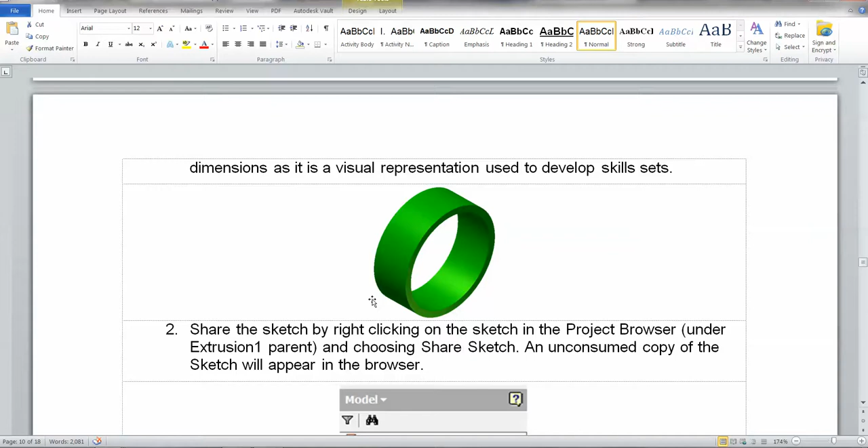Okay, so the next part we're going to look at here is creating this tire, the tire that goes around the wheel on the Automoblox set. Some of the dimensions are not exact, but the basic idea applies. First thing we need to do is create part of this sketch, and it will look like this, and these are the dimensions you want to use. So take a moment to do that and then come back.

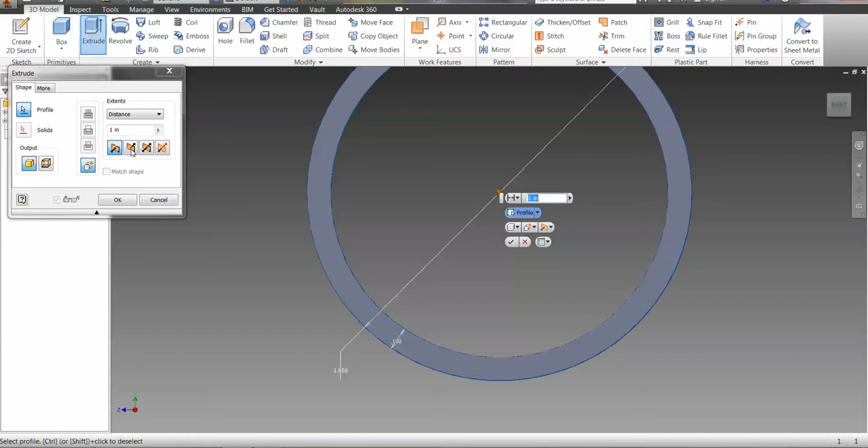All right, now what we're going to do is extrude this. We're going to do a slightly different extrude than we've done before. If you look over here in the extrude, there are different directions you can go, including what's called a midplane, which goes both directions as it extrudes. As you can see, it's coming both forward and backward. We're going to make this an inch, sketch is fine, and then click OK.

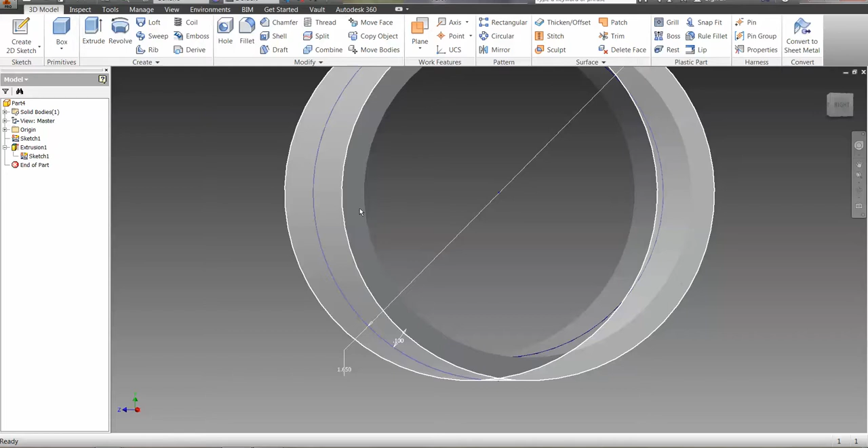Now we're going to share this sketch so that we can use it again. We've done this before, but one of the things is that as we share the sketch, it can be really difficult to see what's going on there. So on the extrusion, I'm going to right click and come down and we're going to suppress that feature. When we suppress that feature, then we don't see it, and it doesn't get in the way of the rest of our drawing, which is good.

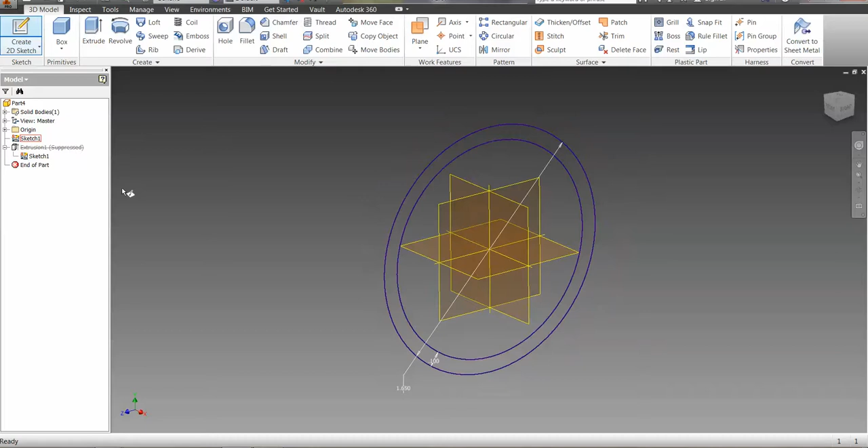So now we're going to create a sketch on this plane. I just clicked one of those circles to get this. Now I'm going to use a few different commands, the line command, starting from the center here, going straight up.

Now when I do that, I'm going to use that as a reference point for two other lines on either side of it, like that. Now these lines don't have a particular distance, it only matters that they come from the center and go past the outer edge. Now I want to keep this line, but I don't want to use it, so I'm going to go back and make this a construction line. There, that's better. Now that it's a construction line, it won't be involved in any of the rest of the drawing, but it is a good reference.

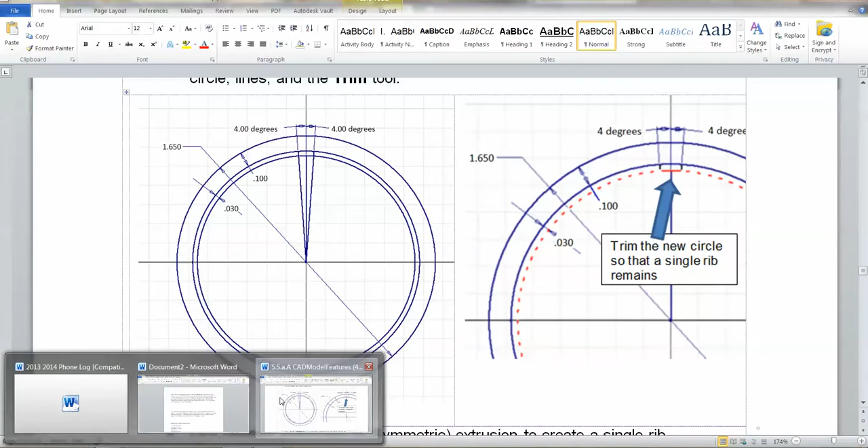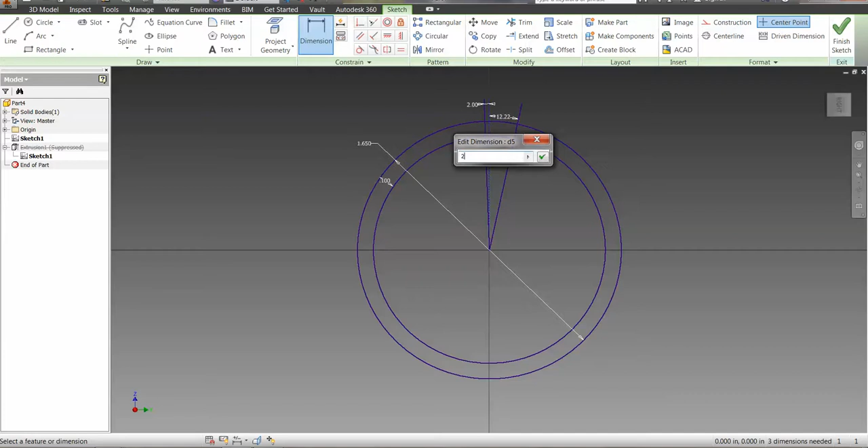Now that we've got that, we need one more circle in here. Do a concentric circle, and it's going to start from the middle like the others did, and just go up a ways. Then I'm going to dimension it from the other circle, the inside circle here, and that's 0.03. So we're just making a very little spot here, but we don't need all of this.

As a matter of fact, we only need a very tiny bit, so we're going to use the trim command here to get rid of a lot of that. Trim has little scissors on it, and anything that we click, it's going to cut around to the next line. So we're going to get rid of a bunch of different bits and pieces here. It's all right that they turn green, don't worry about that. It has all the dimensions that we need, and it's just this little bit that we needed.

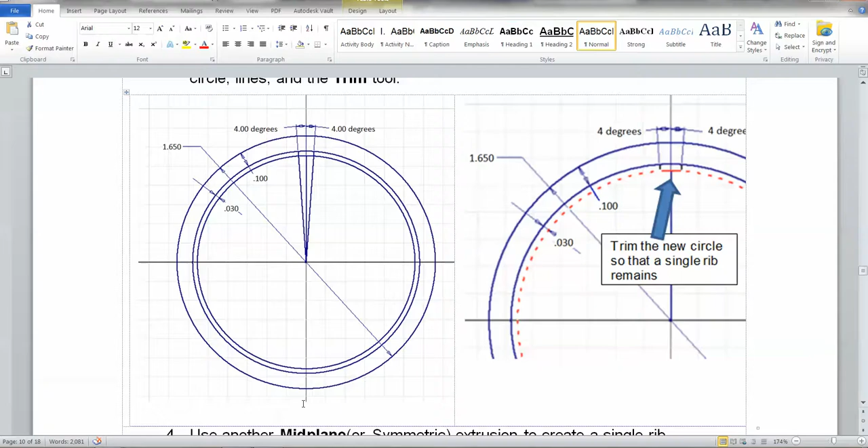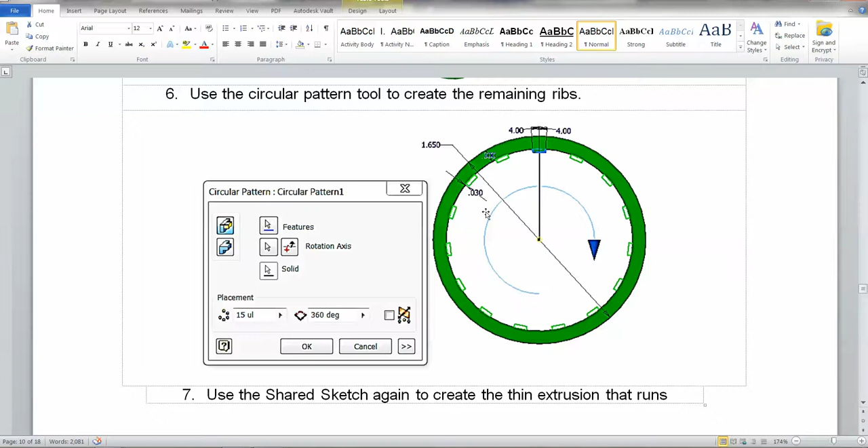And we want to make that a circular pattern. So looking back, we've trimmed it down to 1 rib, and we're going to make a bunch of those. There are 15 of those ribs total here, and we want them to go all the way around, so we're going to do that.

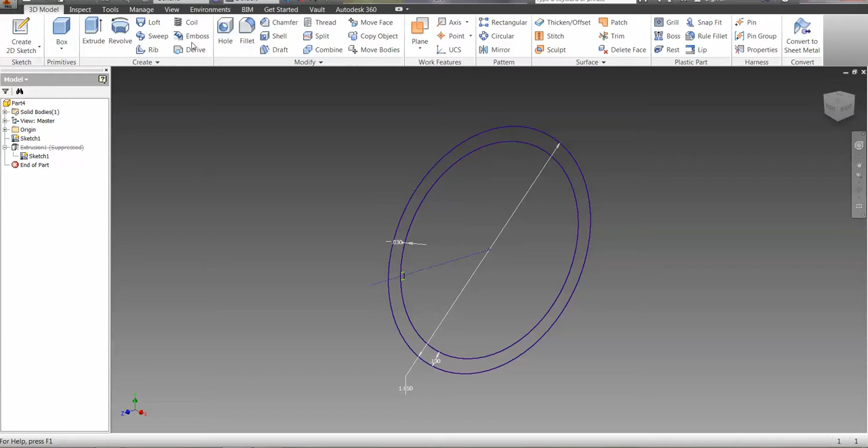So on here, we're going to use the circular pattern, choose our geometry. Actually, we want to extrude that first, so let's finish sketch, we know where that is. We're going to extrude this little bit right there, and it's also going to be a mid-plane extrusion, but this one's only going to go 0.75.

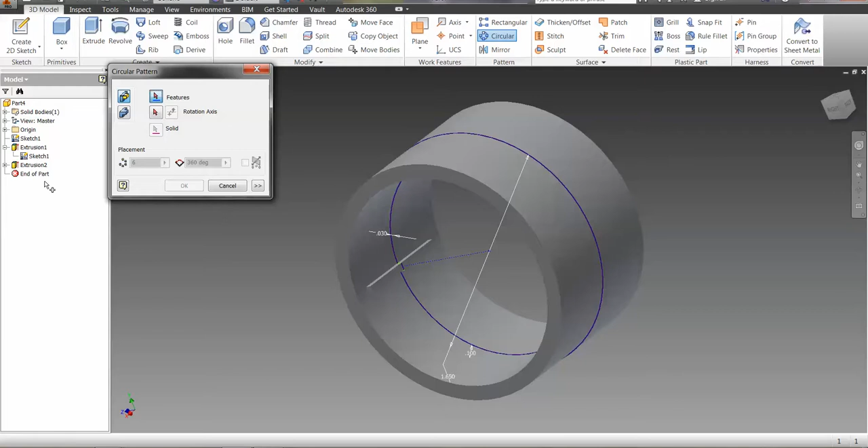Now let's bring back the other one. So we're going to go back over to the extrusion that we have suppressed, right click it, and we're going to unsuppress, and then we can see the rib there that's coming around, and we're going to use our circular pattern to make that. Now the feature that we want, we can actually come over here and click extrusion 2 as our selection, and then for our rotation axis, we just need any one of those rings that we can get there, and we want 15 of those, and click OK, and we have our 15 ribs.

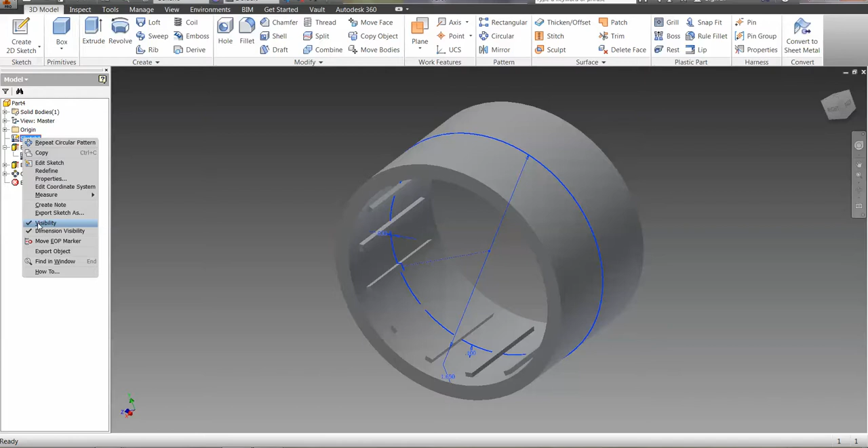Now this all looks good. The one thing else we're going to do just to make it look a little bit better here is sketch 1, right click that, and come down to visibility, and click the visibility. That makes it sort of invisible, and now we're left with our ribbed tire there, and that's what we're looking for. So you can save this now, and we'll call that tire. So that's the Automoblocks tire that we are saving.